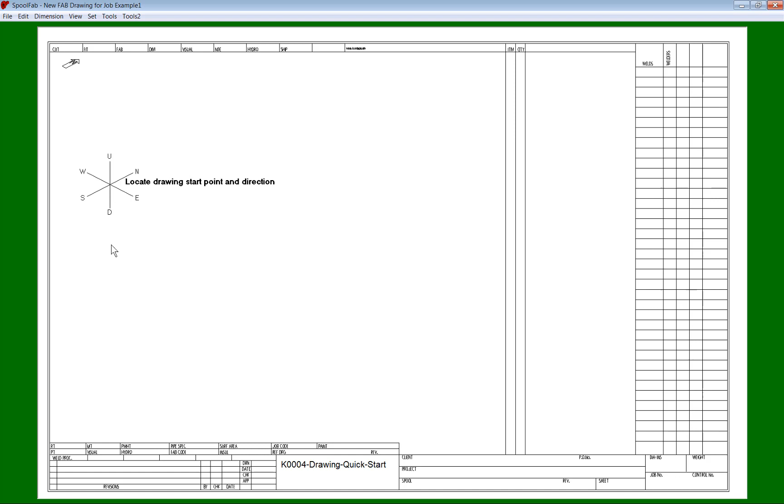So let's get started. We start by going File, New Drawing. We click where we want to start to draw, click in the down direction here. Pick a spec, pick a size, 10 inch in this case, weld neck flange. I can press the space bar to flip the image choice, but I'm going to stay with the default here. Left click to accept that.

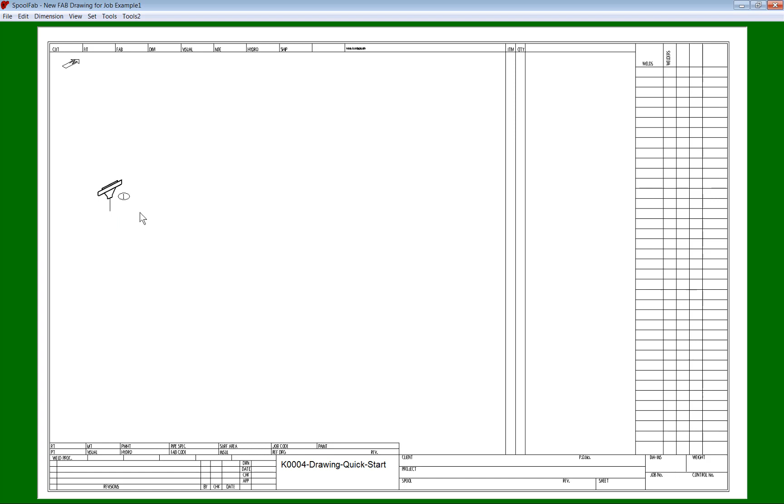I'll hit pipe to draw the vertical pipe. The first click places the pipe's item tag, the second click ends the pipe. Then we'll draw a 90 elbow. Right click to go around the choices; the second time rounds at 45-degree increments. Left click to accept, place the dimension. We'll make this 6 feet 5 3/4 inches.

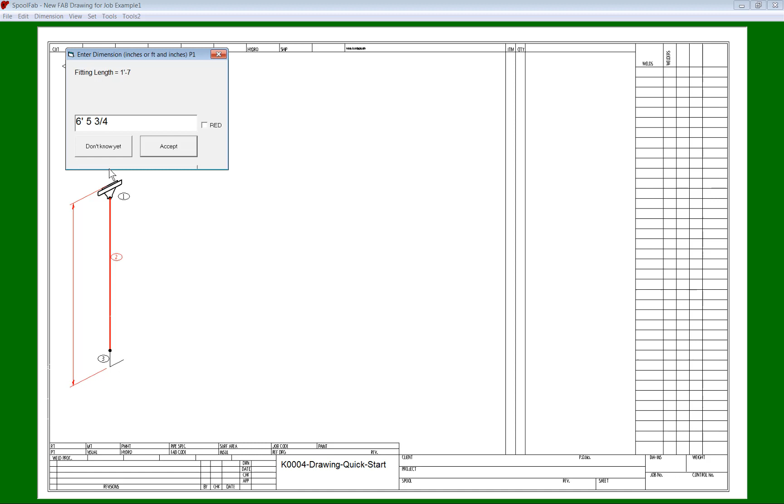Then we'll draw the horizontal pipe and put a 45 elbow on it. Again, we can go around and make some choices here, but let's just stick with the vertical plane for now. Left click to accept. We'll make this 9 feet 6, simply.

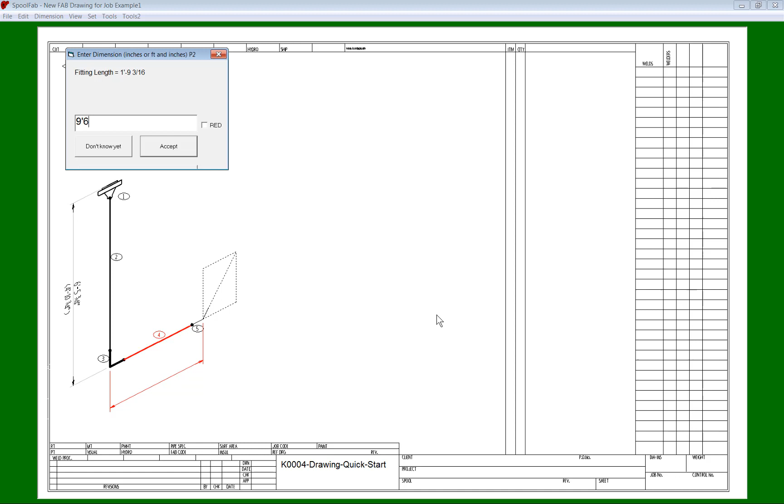Then we'll draw the diagonal in the offset box here, because this is going to be pipe as well. And then we'll finish the diagonal with a 45-degree elbow, which gets us back to the horizontal. And I'll place a dimension here, which will be 56 inches. And of course it converts.

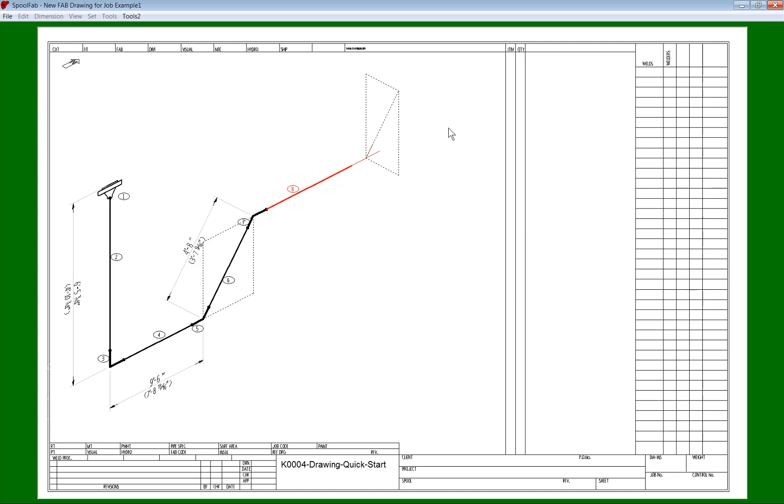Now we'll draw a horizontal pipe again for a little bit, and we'll make a T. This would be a straight T. Right click to rotate around, the second time round at 45. Left click to accept, place the dimension. I'll make it 120 inches.

And on this end I'll put a weld neck flange again, because I can't put a slip-on flange on a T. Weld neck, and of course it already knows the dimension, so it fills that in for us.

Now we could go on drawing gaskets or something here, but let's click on the branch and we'll draw straight down. Let's put a reducer on here, concentric, up to 12 inches. We can make it bigger or smaller, but let's just stick with this size.

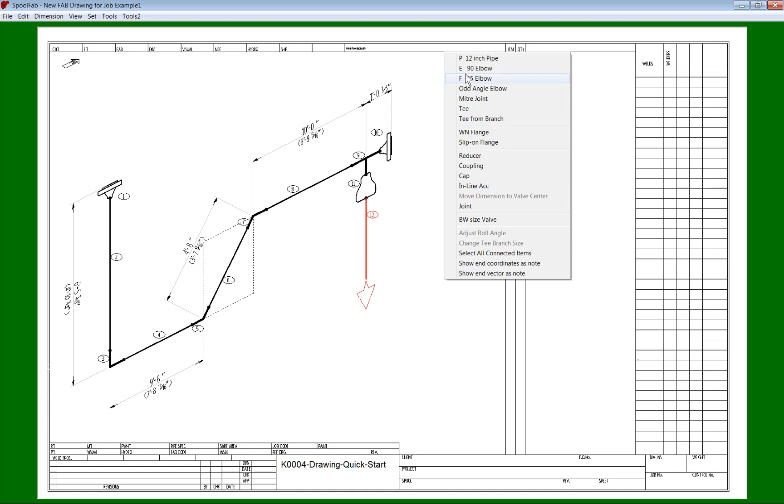And then we continue to draw now 12 inch pipe from there on. And then of course we have another 90 elbow, and we place another dimension here.

Now I press F4 to update the bill of materials, and we'd like to save what we've done so far, so I'll go File, Save As.

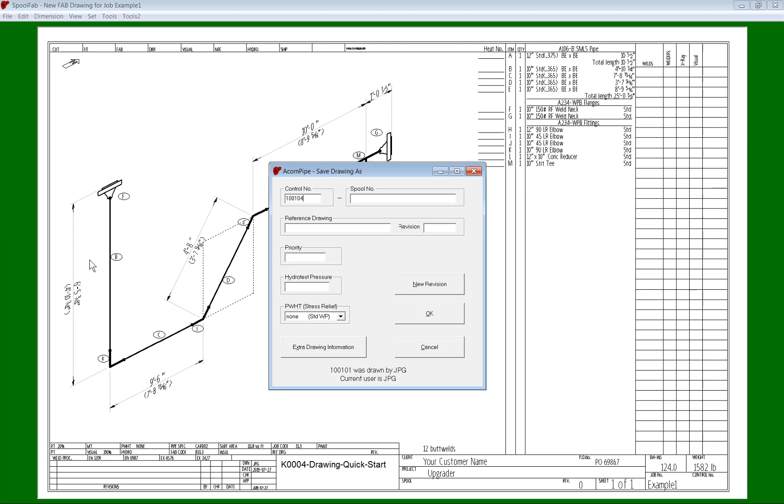Let's take a look at the bill of materials up here in the top right. There we go. That gets updated every time you press F4.

Let's add a weldolet on this horizontal part. We click on this horizontal pipe where we want the branch. Butt weld branch, standard weldolet. Make it 3 inches. Right click to rotate around the pipe. I'll keep going till it's vertical.

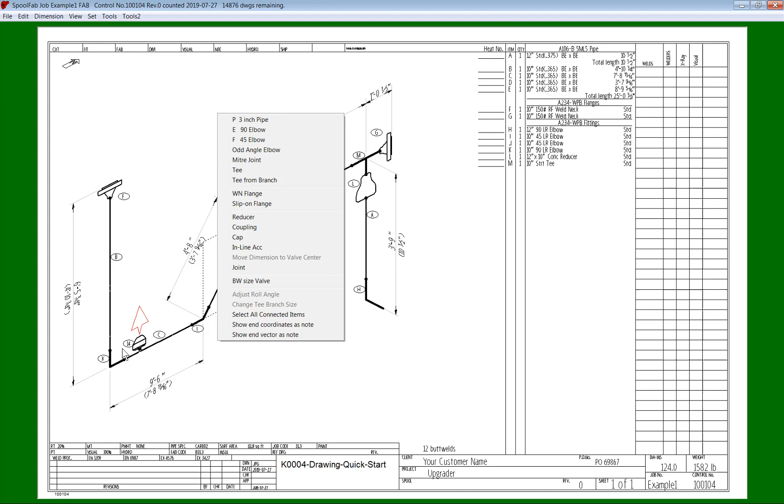Left click to accept. Then we can add a 3 inch pipe coming out of this weldolet, and we'll just end it there by going Joint, leave it with a bevel end, and place a dimension here. I'll make it 43 inches.

Now suppose we wanted to put some more branches along here, but this horizontal portion isn't quite long enough. We go F11, click on the elbow, shift click on the next pipe, press the 9 key on the numeric keypad, enter. That gives us a bit more room so we can add another branch.

Let's make this a socket weld branch, so we'll put a sockolet, 3/4 inch. We can do the usual things. We'll make it vertical, and then we can add a coupling—it'll be a plain both ends pipe nipple, which might be, let's say, 4 inches long—and we'll just accept that.

We haven't drawn a slip-on flange yet, so I'll put one over here. Of course, I have to draw a bit of pipe first. Then we have slip-on flange, regular slip-on flange, left click, put a dimension on here, and save. So File, resave.

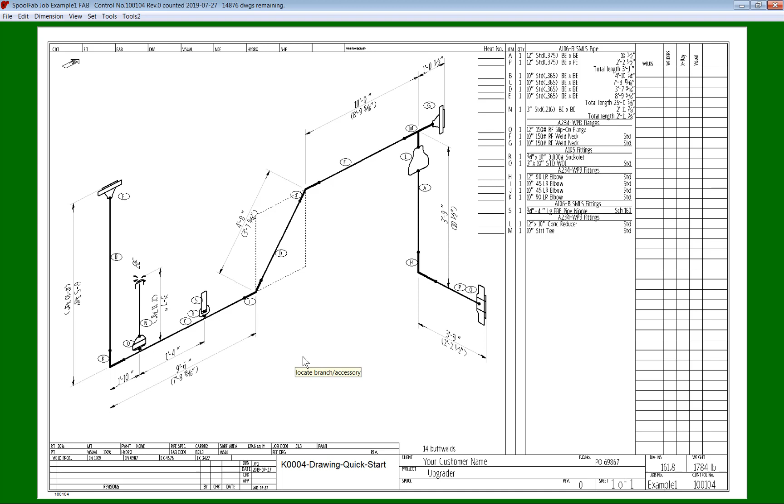Now you might want to add a weld map, so we'll go Control W for weld map. Then you press F9 and this little hand appears. It lets you reposition the weld tags like this, so they don't interfere.

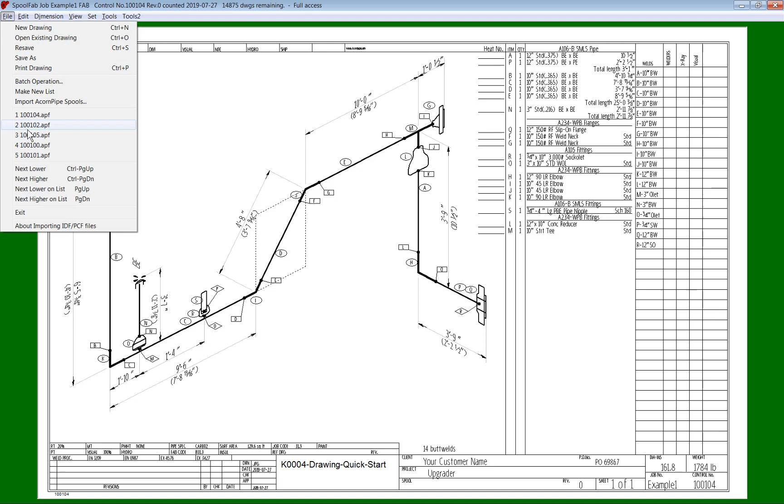So we've seen in this video how to draw pipe and fittings using SpoolFab. Let's have a look at the list of other things we can draw: notes, standard details, draw your own details, and images. Those will be the subject of future videos.